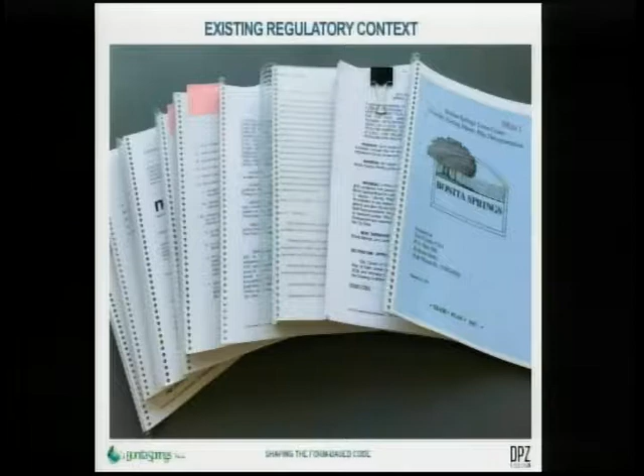These are basically the existing regulatory context, starting many years ago - I'm not even sure what these were, but it's a lot of the documents which we looked at, the zoning code. There was also a very nice white paper written a few months ago, which was very informative, giving us a succinct summary of all the public workshops where you have talked about these issues.

And also in the current existing code, we actually saw many elements of this smart code which I mentioned to you. So we knew that you as a community, your leadership, and your staff are already familiar with form-based coding. You're already implementing a lot of these form-based principles, like how you position the buildings - I'm talking about the overlay in the downtown. The buildings should have parking hidden in the back, you regulate height, some relationship to the sidewalk, and all of that.

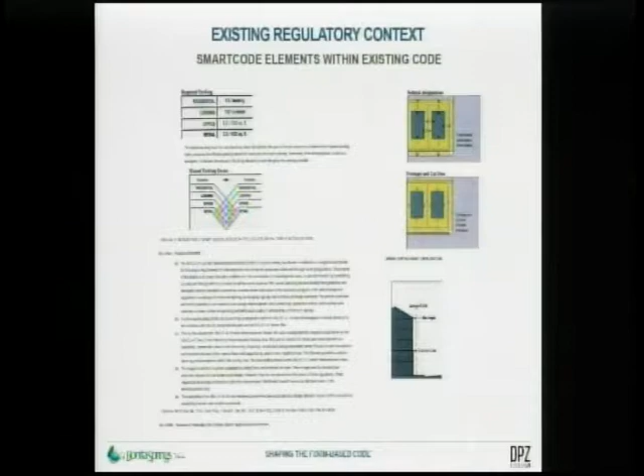So what we want to create now is a finalized, good document, well illustrated, and also not only illustrated, but with a good background, a good backup in the lawyer's language. The law has to be in a written form and also in a drawing form.

So there will not be any doubts or any kind of lengthy negotiation. We would like to create a document which basically represents the vision of the community, what you would like to see as a community, and then to make this code basically easy to implement.

It will be a code which the private sector will be incentivized to go for, with this vision - okay, the community wants this, I'm going to provide this type of building. We agree on how this building will look. It will be this high, it will be a shop front, let's say, and then maybe some residential above. It will have this kind of relationship to the sidewalk.

And if the community has agreed to this overall vision, then it will not be necessary for every project to go through public hearings and lengthy council meetings and all of that. We heard that it's a lengthy process these days - for some projects of mixed-use nature, you need to go through even comprehensive plan amendments and things like this. So we believe that with this simpler, more user-friendly code, it will be easier for the public sector to administer, and for the private sector to actually invest in your community.

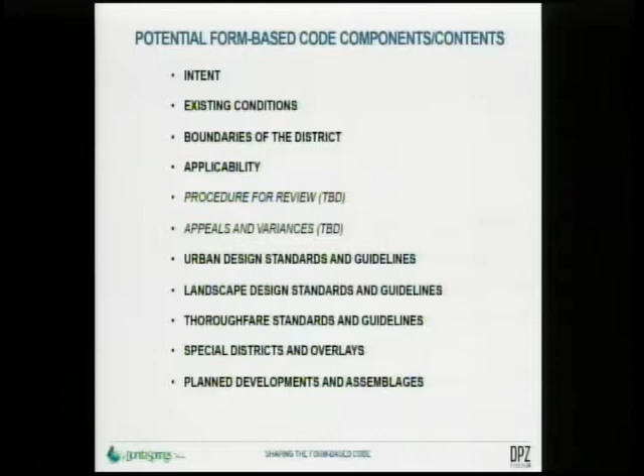So usually a code has an intent, existing conditions to some extent, then it shows the boundary of the place for this code, applicability, procedures for review, appeals and variances. Some of these procedures may go further down in the lower table of contents. Then we have urban design standards and guidelines, landscape design, thoroughfare standards, special districts and overlays, and planned developments and assemblages. That's a very simple table of contents, which is technical in nature, but I will walk you through it.

The intent usually comes out of the feedback from the community. I may start actually reading it from the bottom up.

The big themes will be about scale, meaning that what we heard is that you want the downtown to remain a kind of small town charm and place. You don't want a mega development, you don't want people to come and assemble huge pieces of land and basically destroy the South Floridian character of the place.

It's about aesthetics. We heard also this loud and clear, that it will be the Florida cracker, maybe some mid-century, that you don't necessarily like other styles or some imported architecture syntaxes from other places. It will be about predictability.

So it's about predictability and also maintenance of the value of people's properties. And of course, new investment and economic growth, within which we want to include the younger generation. It's not only because of the smaller scale, we believe that local people who are starting out may be interested to invest and be part of the economic growth, not only as users but also as participants in this next economic phase.

The other ones are: encourage mixed-use development, which is obvious within the downtown areas, and support viable, diverse, locally oriented businesses and cultural institutions. You have all of these things happening there.

We saw the county library taking shape. There are many things to be said about the scale and all of that, but it's a civic building and the county is paying for it, I guess. So we have to be happy and grateful that this building is right there. Because you have the big park in the front, the big square, actually the scale is appropriate. It's a big building.

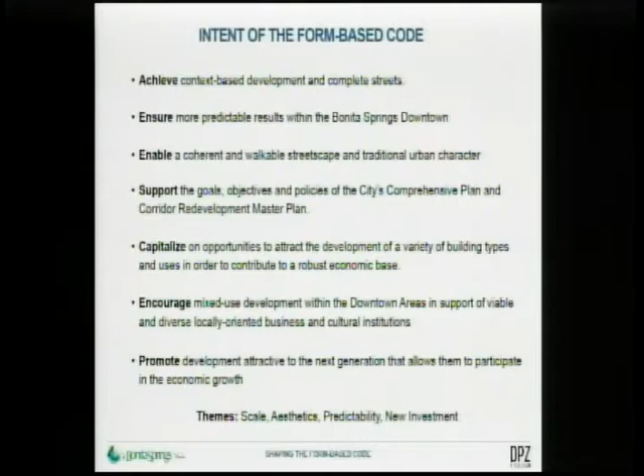We will be seeing whether there are any conflicts with the comprehensive plan, and if there are any, we'll be discussing possible integration or even some changes to the comp plan.

Then enable a coherent walkable streetscape, which we talked about: context-based development, complete streets, more predictability. This is a list we'll be working on together with you, and if you have other ideas, we can craft and wordsmith it. We will also work with the staff and city leadership on this introduction to the code.

In the prior presentations, we talked about the flexibility of this form-based code, according to the comfort level of the community. We are demonstrating that the code can be presented as a thermostat, dialed up or down according to your desire for control, for lesser or more.

For example, in this case, you're controlling the shape of the building, how it meets the sidewalk, whether it's a shop front or a gallery, height, volume, the parking in the back. If you want to go further, you can address architectural features, windows, roof configurations, materials, colors, etc. We were just talking before about the new colors of the City Hall, and how everybody has opinions on these things - some are very subjective.

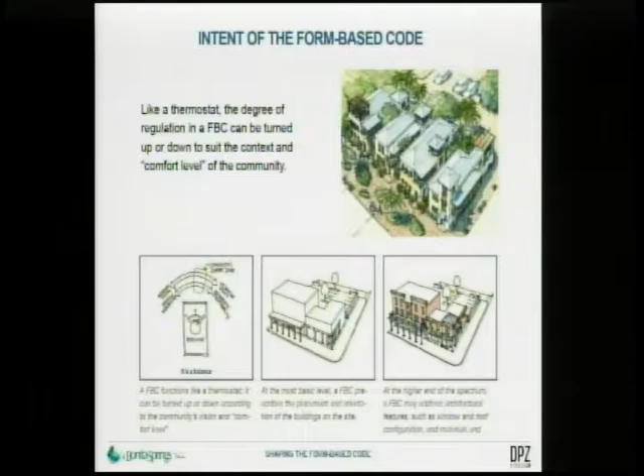For example, if this is a shopfront situation on a retail street, perhaps the setback is very small. When you have a small sidewalk - and in an existing condition this is usually the case - the sidewalk is not wide enough. So instead of saying the setback will be zero because you want the shop fronts, the retail, to be very close to the sidewalk...

...but if the sidewalk is too small, then maybe we can give the setback a little more depth, using some easement on the private property to enlarge the sidewalk and maybe create a plaza, outdoor seating area, or cafe. So the setbacks in most cases are usually, let's say, from 5 to 15 feet or 5 to 10 feet - it's never just one direct number.

I like some of the commercial examples, and in the residential neighborhoods, some houses are good, with the garage set a little further back so the parking isn't in your face, things like that. We saw that the code is not going to be 100% based only on what you have - we will put it at the next level.

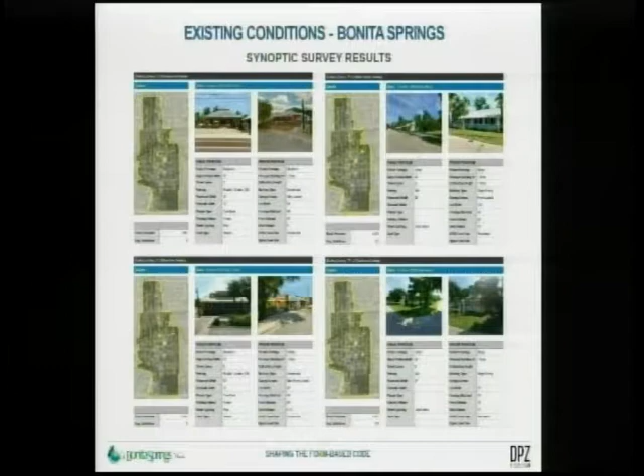We also introduced the idea of the TRANSECT, as we did in the Bonita Beach Road land use study - I don't know how many of you are familiar with it or remember it - but it's basically a system of classification deploying the conceptual range of rural to urban to arrange in appropriate order the typical elements of urbanism.

You can see the TRANSECT goes from nature through rural to suburban, general urban, urban center, urban core - meaning from the most natural and rural all the way to the most urban condition. This is a principle or method borrowed from ecologists.

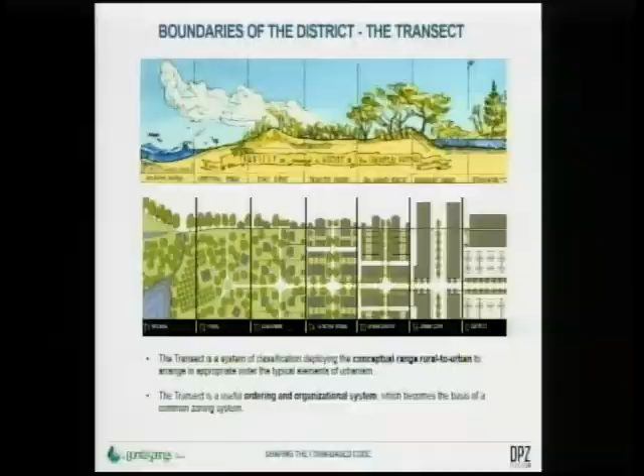It's an ordering and organizational system where biologists were organizing flora and fauna according to different species, and in certain environments flowers, plants, and animals prefer this type of environment. Others prefer the hillier or mountainous terrain, or the water. It's very similar with the human species. Some people prefer to be downtown, others a little further away in the more residential neighborhood. So we don't preclude anything, we don't say no, you're not going to have that. We basically allocate it. Even the gas station or the auto repair have their place.

In your particular downtown, there will be a special district, which is an industrial area, where maybe some of these things will be allowed, whether it's a gas station, some repair, or some kind of very light industrial use, whatever the community decides on. And of course, in the downtown area, in the most urban core area, it will be a mix of restaurants and shops and residential and offices.

We will have 3 main TRANSECT zones, and each of them will have sub areas. For example, T5, we call it the urban center. Usually the TRANSECT goes all the way to T6, the urban core. But because you are a small town downtown, you will probably be at the level of a main street urban center, where you have mixed-use buildings, vertically mixed, but also some buildings which will be

horizontally mixed. Horizontally mixed meaning that some are purely commercial, and then next door are residential buildings. This is also a mixed-use environment. It doesn't need to be like the pancake type of vertical mixed use. You can have mixed use horizontally assembled, and this is basically the flexibility of this form-based code.

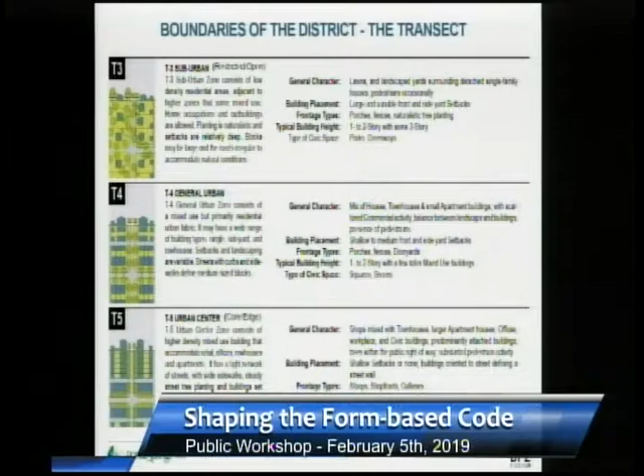Then there is a general urban area where it's a kind of mix of houses, townhouses, small apartment buildings. There will probably be much lower commercial activity, if any—something like a live-work unit, maybe a corner cafe. Maybe not. And then the predominantly suburban area, which is predominantly residential, where you have your normal bigger houses, and plenty of that.

So these zones, like T5, T4, and T3, are basically illustrated with a mix of places here in Bonita Springs and also around the country. We did find, for example, a small apartment building which is 2 stories and looks like a house, a bigger house, but it's actually a small apartment building—let's say 4 to 6 units or something like that.

These are very versatile, nice building types for younger people who do not necessarily prefer a large apartment complex, and would like to be in a place of single-family housing close to a school or close to the downtown, and still be in a more affordable and more walkable environment close to the downtown.

Or a townhouse, for example. This is a townhouse which recently, in the last 50 or 60 years, has received a bad name because they were townhouses in the middle of suburbia, townhouses without the town—like little train racks in the middle of parking lots, not townhouses as part of a town.

So it's a building type which has returned a lot, at least around the country. This is in Coral Gables, which is also a leafy suburb, like a suburb of Miami, but they have townhouses, and they're extremely successful because of the shifting of the market. The younger generation wants smaller units, fee simple, like single-family housing, but without the big yard to maintain, as well as the retiring population.

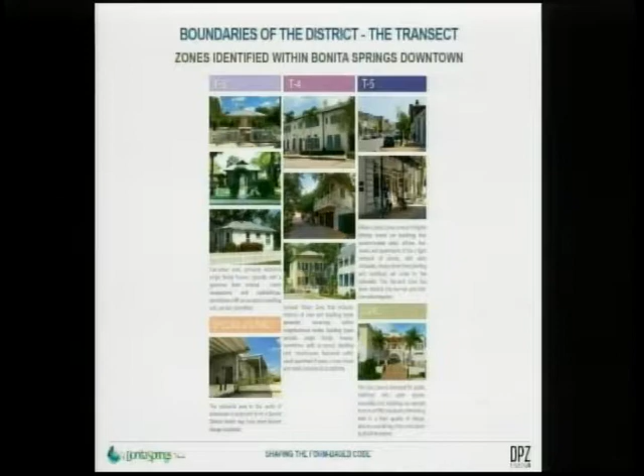And right now, in your neighborhoods, in your residential areas, you have the townhouse as an allowed use or building type. So these zones you see here are basically based on your town center concept plan—this is the old US 41 corridor redevelopment master plan. I imagine that this came as a document following a lot of public involvement. What we noticed is that it is a kind of very specific zoning.

There was one piece here, and I don't remember exactly where it was, like, oh, this will be a hotel, or this will be the townhouses right here or right there. It was very specific in its predictability, kind of like spot zoning.

What we would like to propose is a more flexible environment along the main corridor, Old 41, which is the most intense area. We have two colors for the T5 or core zone, a lighter and a darker one. The darker is the most mixed use, intense urban area. The rest is T4, a mix of townhouses, small apartment buildings, and houses. Then it transitions to T3, the more suburban residential areas on the east and west.

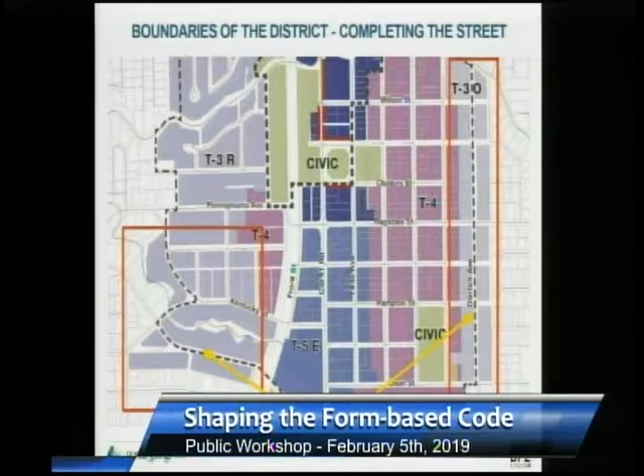There was some feedback when we presented this regulating plan last time. We heard that we made some mistakes—people said, oh, this color, you have to expand, you have to move it around. This is the beginning of the mapping exercise, so we'll be working together with you to understand what you mean.

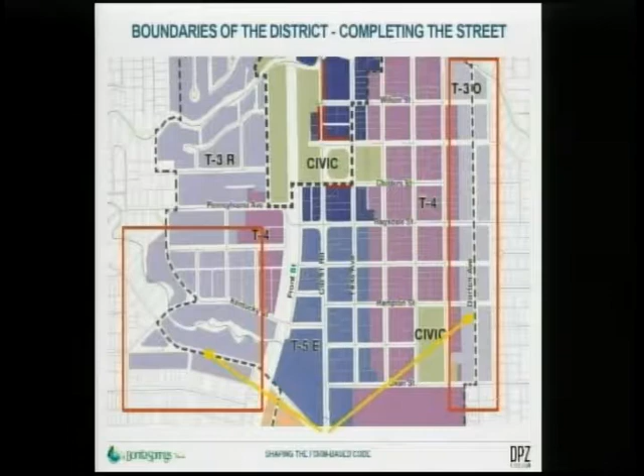Just to show the existing boundary, and how we are expanding one layer outside of it, so the street feels more symmetrical on both sides. Not that it's impossible to be asymmetrical—if you decide you want your downtown boundary in the middle of the road, that can be done, but we recommend the other way.

This was another public workshop comment. I think we had a different color for this T-zone, so we basically changed it as recommended.

The applicability of the form-based code—what does it mean? As I said before, it applies to the existing Bonita Springs downtown master plan zone and additional blocks shown on the previous slide. But actually it is expandable, as I mentioned, it can go further.

It's either for the nodes along Bonita Beach Road, the intersections with the big thoroughfares—you could apply form-based code only for those. Because today we were driving along Bonita Beach Road, and honestly, it's not going to be urbanized anytime soon. It's basically a more suburban type of thoroughfare because it's your major east-west transportation corridor.

It will be important that your nodes have a different character, so you know you're arriving at downtown. The one at the intersection with Old 41 is probably the most important, as your gateway on the east side and also to the beaches. So these are areas where you could consider expanding the form-based code.

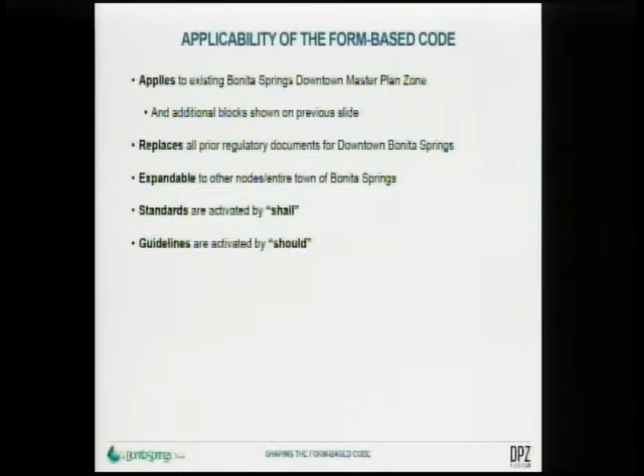But you can also apply guidelines, which are activated by 'should.' For example, what is a guideline which should? Like maybe the frontage of a building should be one of 3 different types of frontage, a front yard or something else. What else can it be? Your window proportions - we were talking about the window proportions of the library and how it's a kind of saving element, really beautiful that they're vertical and big.

Maybe you decide that all of your windows throughout the downtown should be a vertical proportion. But maybe somebody does a building in more Art Deco architecture syntax and they want horizontal windows. That's why, since you're not certain and want to see how it will be built, you say windows should be vertical proportion, meaning it's not mandatory, it's recommended. People usually tend to follow it because it's easier - when something is written as 'should be,' they know it will probably be easier to get approvals when they follow the guidelines. But these are recommendations, not necessarily mandatory rules.

So there will be standards and there will be guidelines.

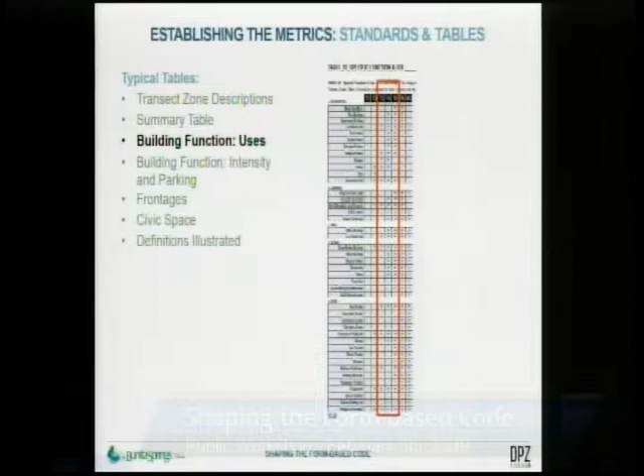Or, for example, a motel. A motel cannot be in T3 nor T4, but why not in T5, if you want it, whatever motel means. It can be an inn, or a bed and breakfast. For bed and breakfast, in this generic smart code we say it can be in T3, T4, and T5 - maybe some of the larger houses are converted into bed and breakfasts. There are many neighborhoods around Florida which are incredibly revitalized because of the bed and breakfast element - they became known on the map because there were a couple of bed and breakfasts in these places, and things like that.

So these are the uses. Then building function, intensity, and parking - this is the relationship of the different uses and the parking requirements. Usually we say that your intensity and density is 100% dependent on the parking, how much parking you can fit.

I believe you have some of these diagrams almost directly applied from the smart code in your current zoning code. This has been changing - all around the country municipalities have been reducing their parking requirements.

There are cities that have eliminated their parking requirements altogether, so in places you can build a building without any parking on site, because it's in a downtown, walkable environment. Why should we require so much parking? The more parking you require, the lesser building envelope you leave for development. You reduce your real estate, and in many cases it becomes impossible to develop anything because parking is expensive. If you want to build something taller, you have to build a parking structure.

A parking spot costs between 20 and 30 thousand dollars. Can you imagine? Recently I learned that we have 500 million parking spaces in this country. We're 350 million people, but we have 500 million parking spaces in garages. It's totally insane.

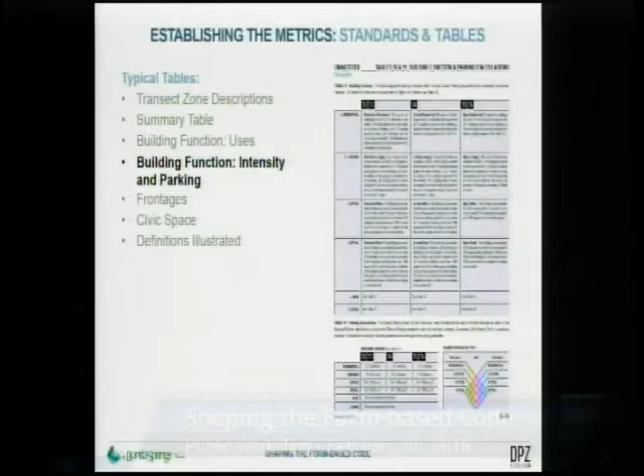Many of these uses can use a shared parking percentage. For example, an office park is empty at night. An office building is emptied late at night, so maybe you can share it with another function. Residential and office can share this parking. Retail can share with something else, like residential or restaurants. We've done this around the country, and people have been very happy, because parking is an issue.

You can be overwhelmed by a lack of parking if you are extremely successful, mobbed by people coming here. It's absolutely possible, and it may be a good thing to have, but we have to calibrate it to your condition. You will tell us what you want to see, whether parking garages, surface parking, or something with the internal flexibility to be turned into something else in the future.

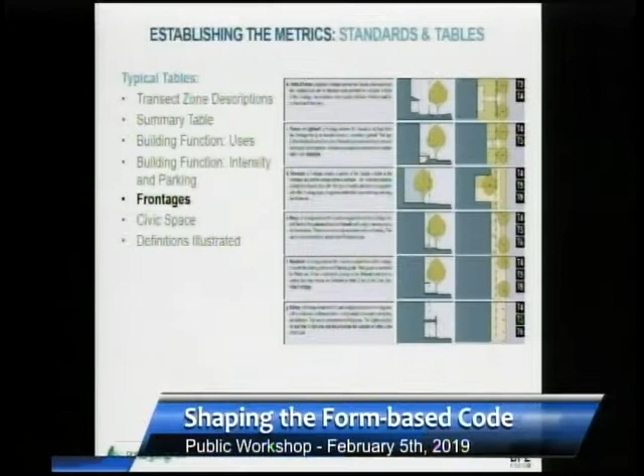Frontages are also a very important element of the code, where we have assemblages of private frontage types, like a gallery, a shop front with an awning, a stoop, a forecourt, all the way to a porch and a fence. Some of these you have here already, very typical, like houses with porches, and galleries.

I don't think that you have any galleries, maybe you don't, or arcades or whatever. If you would like to see some of those in your downtown, we can very easily implement them, or it can be something very simple as awnings, for example, along your retail streets.

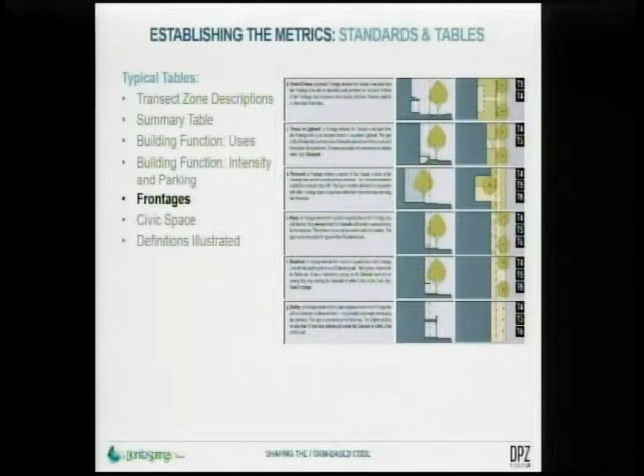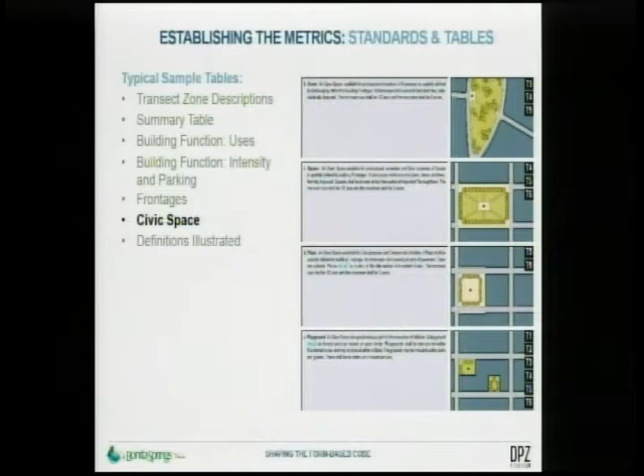Civic space, how you shape civic space, this is important, that there are different types: playground, plazas, squares, greens. That's also very important, how the terminology is defined, and how we as a community can share the same terminology. For example, why is it important to have a term like a plaza for something which looks like a square and then it's a green? Because they have different characters. It's open space, yes, and there are buildings around, but they're different in character. And this will actually be the beauty, that you can go from one street to the next and encounter public spaces or streets of very different character.

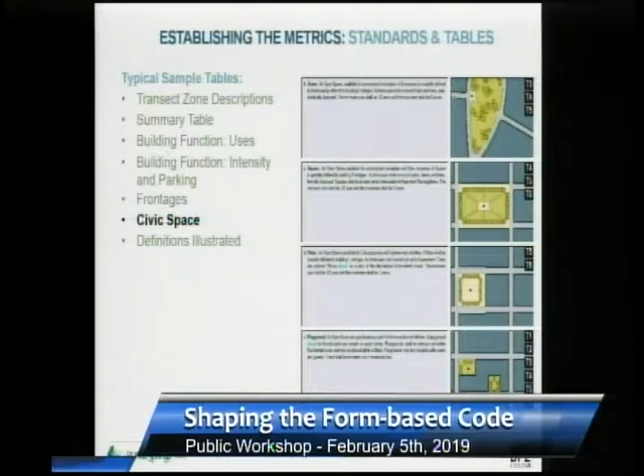Along your main corridor is the most urban with the shops and all of this. Then you go further in and maybe have a smaller space, then you go to your square, let's say the big square in front of the library, but then maybe on the edges where the water is, where the creek or river is, you have a totally different character. So it cannot be the same design and the same means applied to these different places. So they have to definitely be varied.

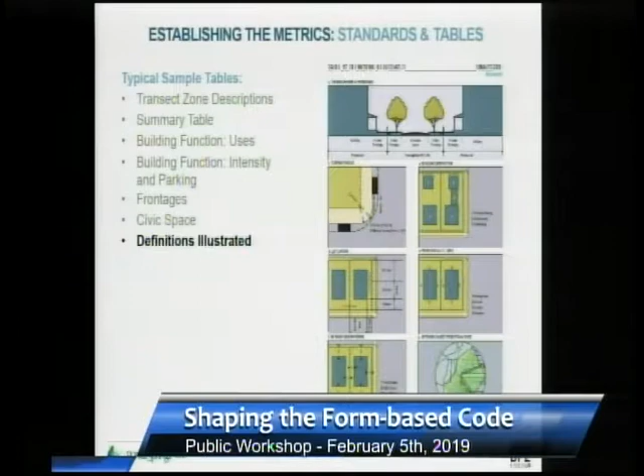Oh, here it is, the definitions. We'll be talking about this, there will be a section on definitions, and some of them may be illustrated.

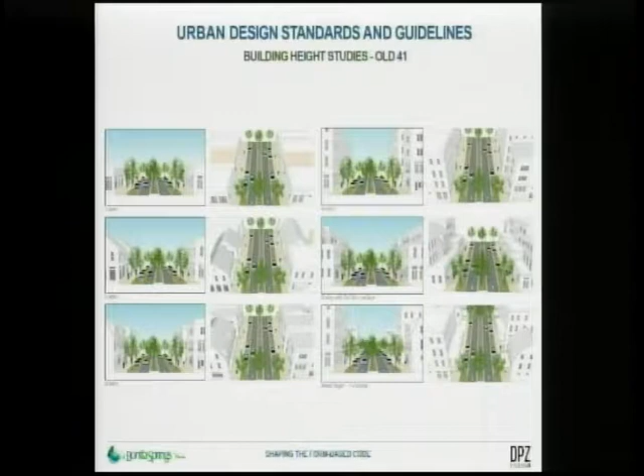And then with the mixed heights, where you can have buildings which are 1 story, and it's difficult to see here, but it's like 1-story, 2-story, 3 stories, and 4 stories. We started the discussion, are you going to put the 4 stories, and how are you going to allow this variety to happen? There was one idea that we allow 4-story only on the corners, or only in the form of a small tower, a smaller footprint building.

Maybe you have a 3rd floor usable terrace with some element which is 4 stories, but not the whole thing. So you're going to have a varied streetscape, a varied silhouette, which may be unique for your downtown. This is an illustration of building height, orientation, and massing. Here we put 4 stories, so you see it's like a 4-story building, 3, 2, and 1, with setbacks. The most important thing from this code will be this drawing. This is only an illustration, not going to be the law, but it's important because it will show parametric size of lots, depth, and setbacks.

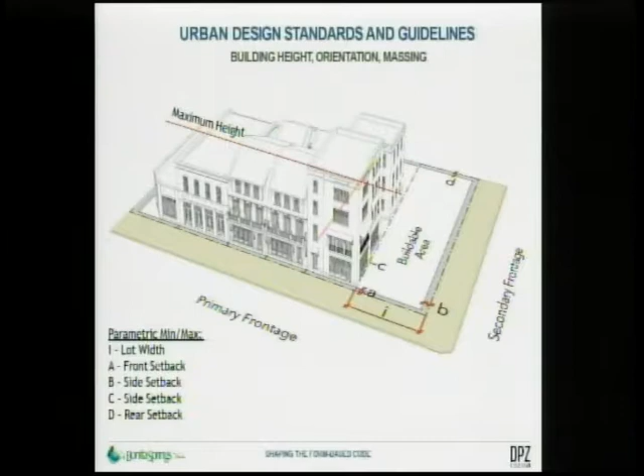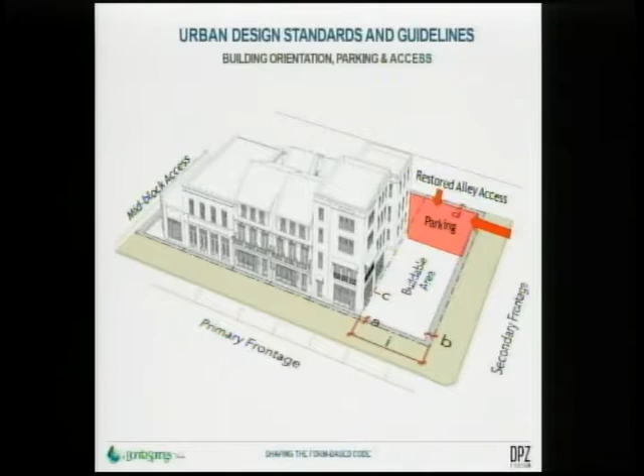It will also be important for the downtown to restore your alley access. You have historically had many accesses and many alleys, and they were basically deleted or lost over history. It will be important because most of these buildings will need servicing, so you cannot have all good fronts on 4 sides or 2 sides. So you need probably the restoration of some alleys.

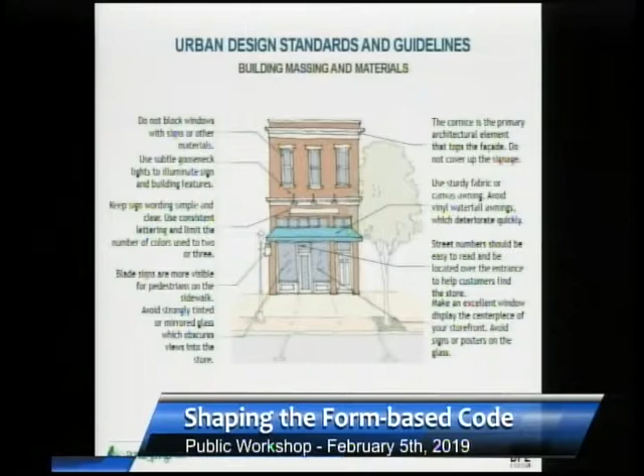Urban design standards, building massing, materials. This is not Bonita Springs, it's from another place, but we just like to explain what we mean by that. These are some rules, and some are more guidelines than standards. For example, we can advise to use particular materials or sizes or colors for awnings, and this will not be a standard, it will probably be in your guidelines.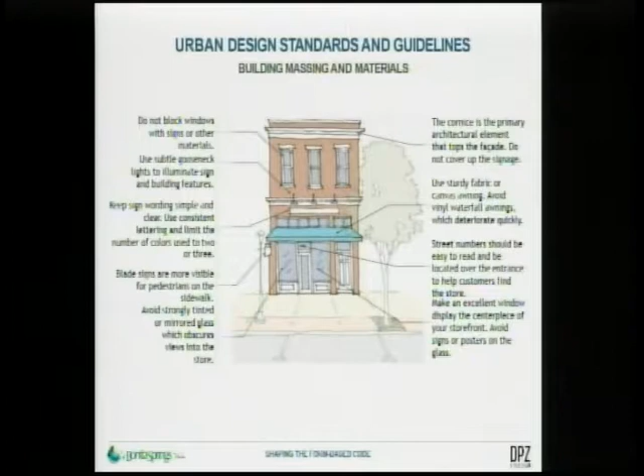Another important guideline: avoid strongly tinted or mirrored glass which obscures views into the store. For storefronts, this will be a requirement - you shall not use tinted or reflective glass, because this is basically death for a storefront. If they do this, they're not selling anything, they're basically hiding, and it kills pedestrian movement and activity.

Here is an even more detailed signage recommendation and guideline - how you do a window sign, how you do an upper building sign, a hanging blade sign. This is basically signage to the galore, and we can actually calibrate for you 3 or 4 sign types, not everything. You don't want to be like the world parade of signage.

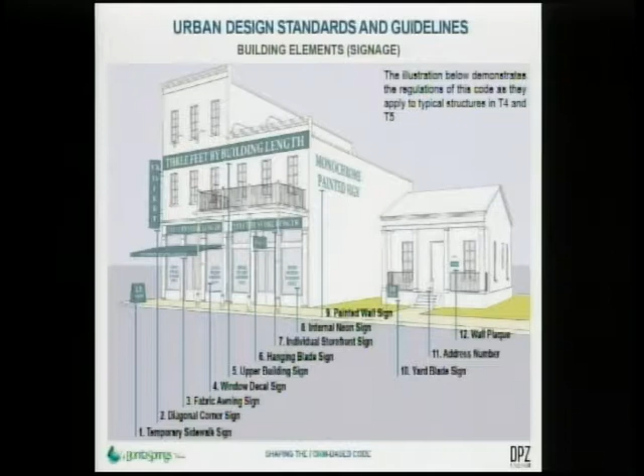So see here, this was a more traditional type of signage, and the same signage situation applied to a more modern building. I'm showing these strikingly different architectural syntaxes as illustrations - it will be up to you how much you want to influence the architecture and the look of your buildings.

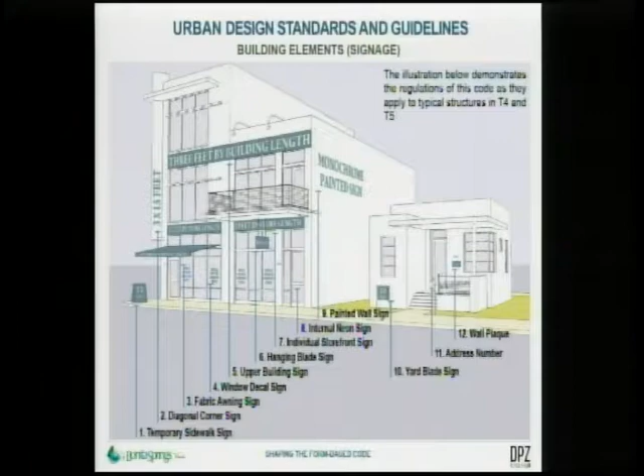Here's how we wanted to illustrate the 4-story option. Instead of arguing whether we want 4 stories or not, maybe you allow it partially. Here in this case, it's 3 stories with just a small tower and maybe a usable floor. This building is 3 stories. In this case, you have a bigger piece - a 4th floor tower allowed. That creates an interesting silhouette.

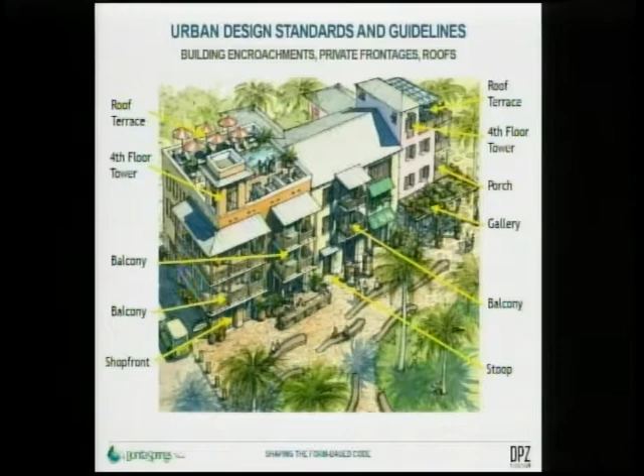So it's not necessarily a wall with a setback like in Naples, but basically giving the opportunity for a habitable upper terrace. These are the different elements - a balcony, gallery, porch, and other things. A shop front here, a roof terrace here, and so forth.

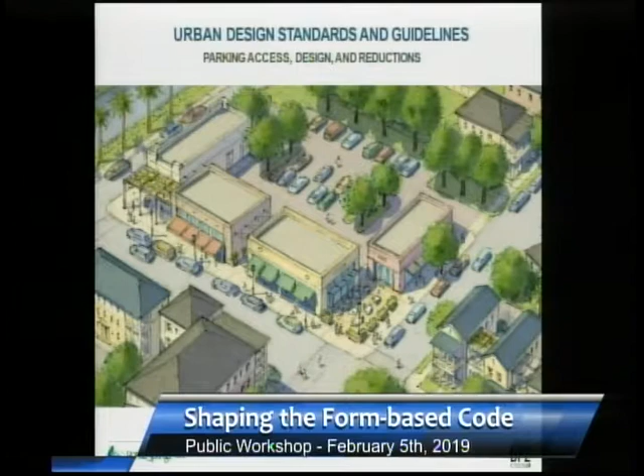These are the parking access design and reductions. This is an illustration - Bonita Springs downtown is not exactly like this, but some of the stores you have are just one story. They're very similar. They don't yet have a unified frontage with awnings or other elements.

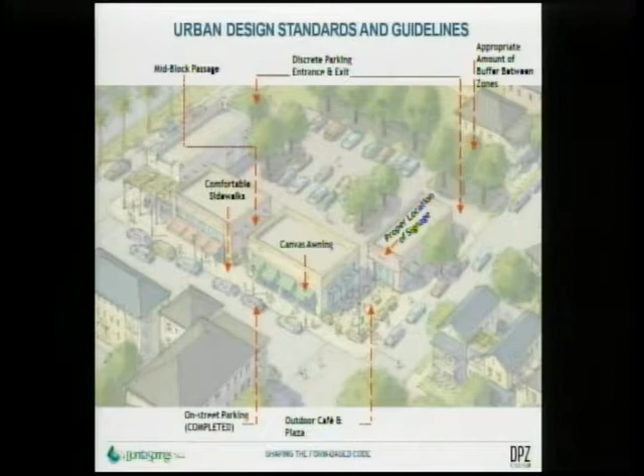But this can be achieved - the canvas awning, the comfortable sidewalk and some passages, the plaza, on-street parking, which you already have completed, proper location of signage, and all of these. This is a long list of a wish list of regulations or guidelines which we can apply or not.

We don't need to. In this case, all the parking is consolidated in the back, and that's something to discuss - whether instead of looking at the parking as a single lot, it can be a shared parking lot in the back.

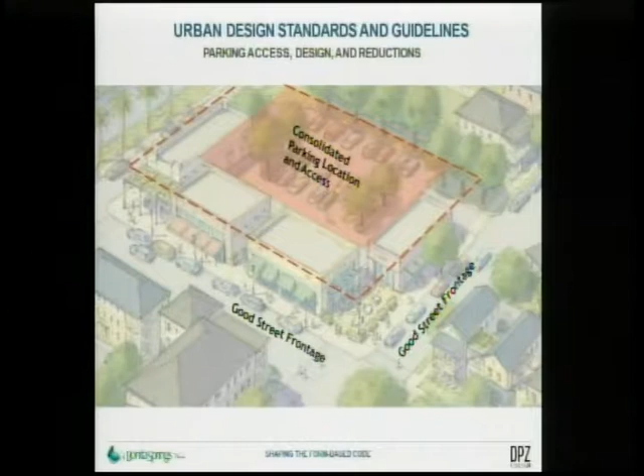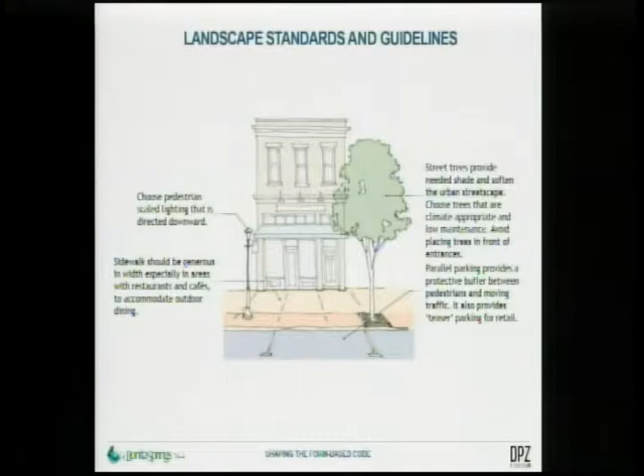This is landscape standards. Of course, this is also an important portion of the code where we will be looking at it, and the good news is that you actually have this already, so it's probably not going to require a lot of that.

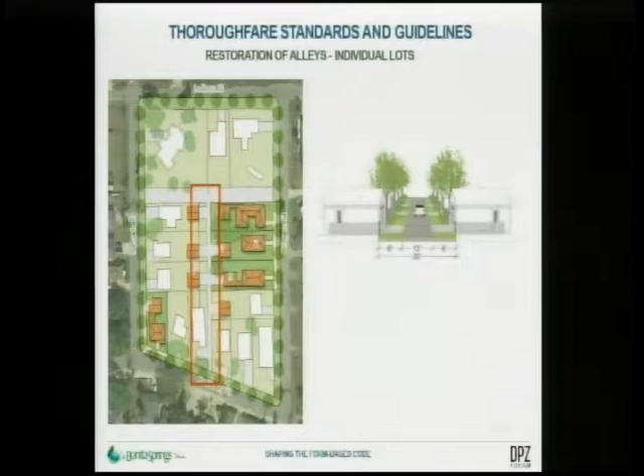The restoration of the alleys. Here are some examples which we worked on, preparing the introduction to the form-based code - the restoration, in an area of single-family lots, how you do it, and you can basically feed the alley with garages from the back.

This one is a larger assemblage - I believe it used to be single-family lots, and now it's a trailer park. Here we are proposing a combination of single-family housing and duplexes around a bigger green with a little alley in the back. So the restoration of the alley gives the potential for really nice development, very compatible with single-family housing, but giving more variety of building types, like duplexes, and creating higher density.

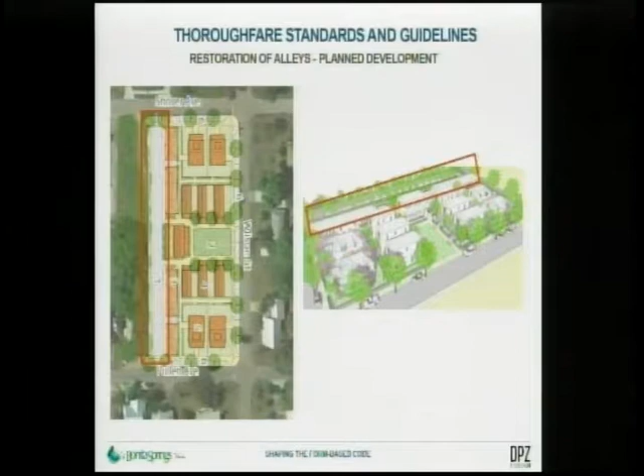For more attainability. Special districts and overlays - I mentioned the industrial area, which we now call a special district, and we thought it would be interesting to propose the possibility of activation of these places in a more tactical way, step-by-step, or cheaper, faster, and more interesting way.

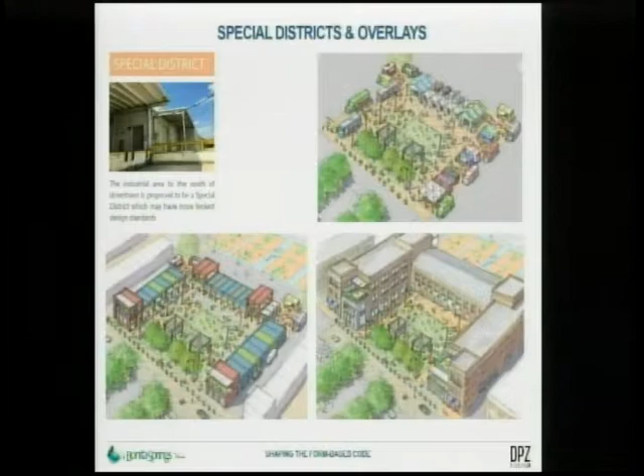Whether it's with food trucks around some public space, maybe bringing some shipping containers initially to show that something cool is happening, maybe artists will move into some of the buildings - it depends what you want to see. There are areas like in Miami, we have Wynwood, which was an industrial area, dangerous and crime-ridden and deserted for many years, and now is the coolest place in town, which has gone through several reincarnations.

You know, there was a place called Wynwood Yard, where it was basically a parking lot with all of this happening—food trucks, a little place for yoga and performances, public gatherings, and all of that. There was also a restaurant, a cluster of restaurants made of shipping containers. Now it's being redeveloped in this last stage of development.

Now it's being redeveloped by Lennar with multi-story buildings. But during the several years of growth of the area, it was not just a parking lot—it was activated with different uses. So this is one idea.

Another assemblage—here it is. The prior one I showed you was with one-story buildings as you have them today. This one is illustrating a little taller, but you still may keep the smaller scale fabric of the place, and it will be up to you what lot size you're going to leave as the minimum size and what will be the maximum.

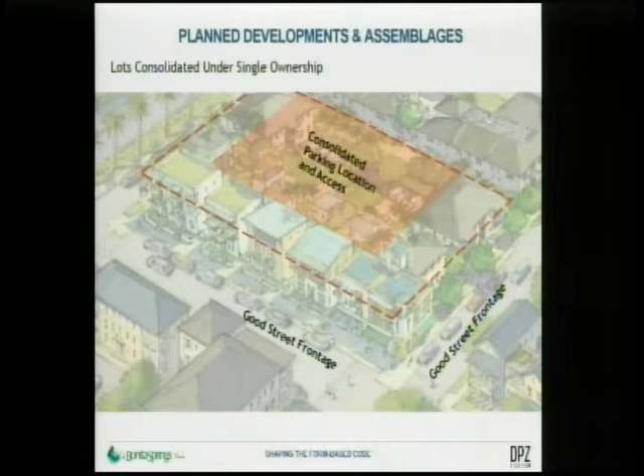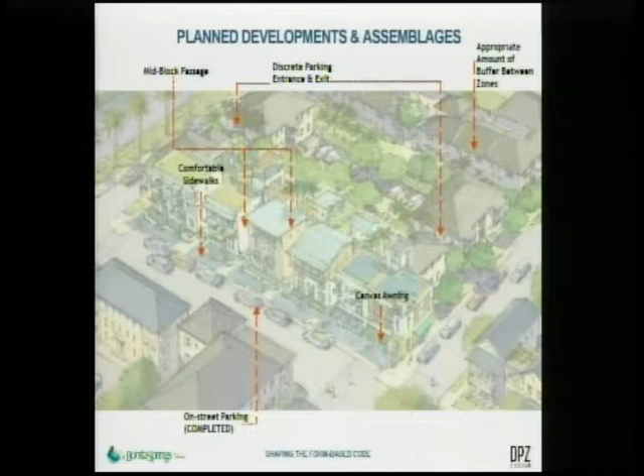What's important is actually to keep the scale of the building frontage, even if it's assembled into one large block—that's not impossible, unless you decide you don't want to make a full block building, which is also a possibility. But even if you allow this large assembly, we can write rules where it will read as smaller buildings. I'm going to show you an example later.

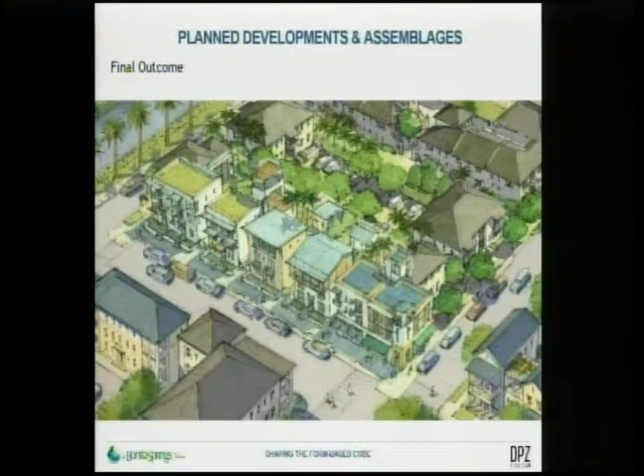See how this one still has the fabric, you can see that. But this effect can actually be achieved even if there's a big parking garage in the back, let's say. We demonstrate this with the so-called bamboo site, which was a separate assignment and task for us.

We were to look at this area, which is basically on both sides of two large city properties on both sides of the river. I want to demonstrate that you can create urbanism with smaller buildings which look like bigger houses, and with surface parking lots.

Or you can go and do something with a garage, but nevertheless you still have incremental pieces of the building—it's not like a mega monolithic thing that suddenly destroys the small town character of the place. So this was an exercise in shaping the scale.

We keep the scale of your town basically to—here we had, I believe, like 3.5 at the most, 2 and 3 stories. Even if you have larger scale parking in the back, or more intensive development in general, it can be regulated. The building size, height, bulk, and look can be regulated with the form-based code.

And I believe that's it. Is this it? The rendering—yes, this was basically done here in Bonita Springs before we came.

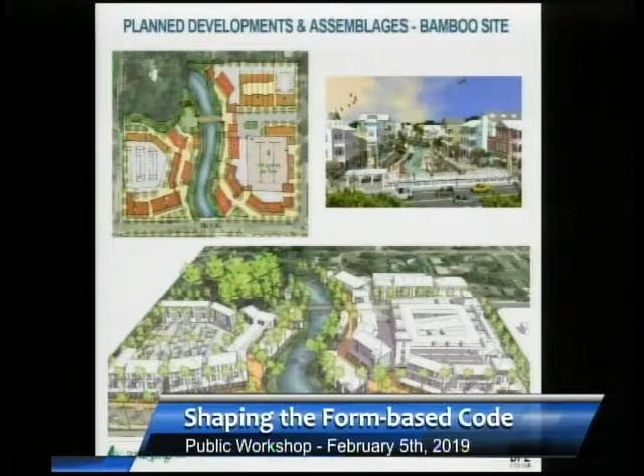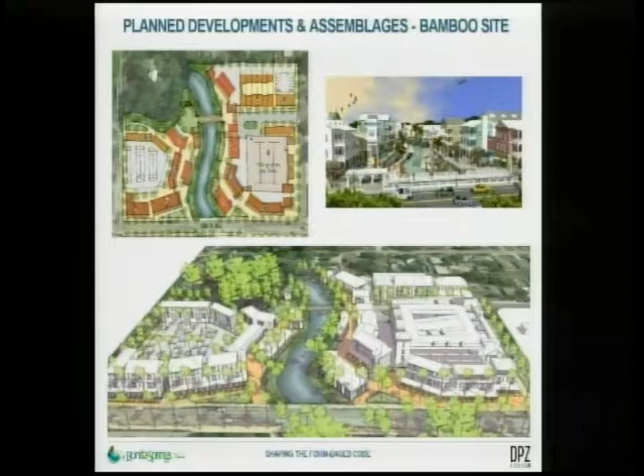In this process, your community vision was about buildings which are detached, not continuous walls of very urban buildings. You're not Naples, you're not Miami, you're not a big urban place. You're a smaller town, a more relaxed South Floridian type of town, which is the original charm of Bonita Springs—that's why people come here. We believe that through the form-based code, we can calibrate this type of development. So if you have any questions, suggestions, or grievances, please go ahead.

The City of Naples requires 100 square feet per... we're recording, so if you could just use the microphone.

The City of Naples, in Old Naples, has run into a problem with parking. They don't quite have the urban atmosphere down there even though it's quite compact. Their requirement for restaurant parking is one parking space per 100 square feet of restaurant space, and it's really cut a hole in the old district because the parking is just too intense. Now restaurants are being discouraged from opening up.

So how will that affect us in this area as far as parking requirements? If you're not so concerned about it by the sounds of what you said, that's going to be an issue for us going down the road.

No, I'm very concerned about the parking, actually. We are concerned about the situation with the parking because we are in a transitional period of time. But I'm just alerting you not to go with the highest requirement right away, and then backtrack and say, oh my God, we built two big parking garages or whatever parking spaces, and now we don't need them. Just be cautious on that side.

We know the situation with Naples, and we did the original master plan in 1990, 1993. They will be adding another garage from what I know. This usually happens in places which are becoming more than their own a kind of local destination, more of a regional destination because of the success of Fifth Avenue South and the restaurants and everything. We will definitely look at the parking situation and try to have a recommendation and a standard which is flexible, something which works today but can also be reduced or expanded tomorrow, and works 20 years from now. When we did the study in 1993 or so, there were no parking garages, the buildings were one story only, and just by restriping the on-street parking we got like 200 extra spaces, which was quite amazing. I believe here you have done most of this. You have a lot of on-street parking, and you should not underestimate that. We haven't done any parking studies, and it's not part of our task this time around, but this has to be definitely taken into consideration.

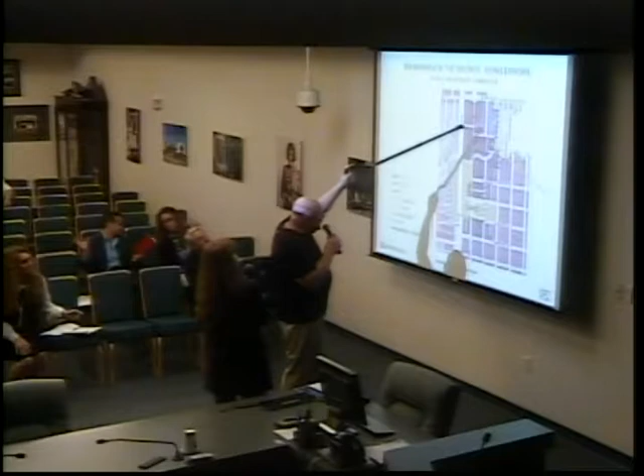That makes sense. And then the other piece I question is this piece right here. It faces T5, so I think it should match that T5 as you come around the corner. I agree with everything else. Those are the only ones I had any problem with at all.

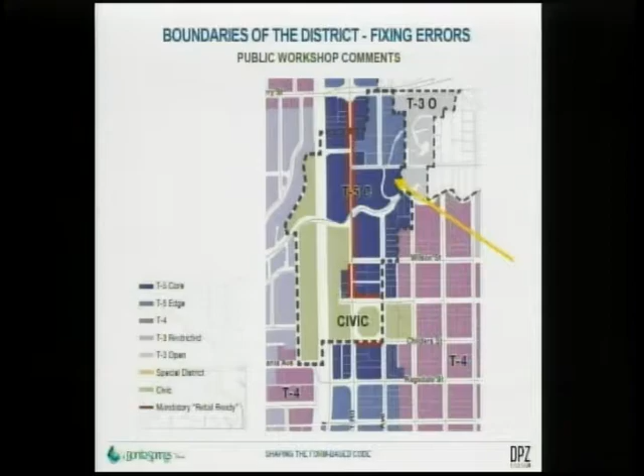Good, good. And we're going to have opportunity tomorrow for specific questions on specific properties. So I think now you're looking for general concepts at this point, and we can spend more time if someone has a specific property.

I just wanted to ask, we had a recent meeting of the Downtown Alliance in which there was a little bit of confusion about exactly what properties and specifically what was involved in this. My understanding is we're talking about the city-owned public properties.

So for this workshop, this is looking at form-based code for the entire downtown corridor. More specifically, DPZ is going to be looking at the city-owned properties and creating a plan for potential development of those, and options to be brought back to council on what that might look like in the future.

Follow up, how will that affect the businesses that are already there? Is this going to change what they're already doing? Is this going to affect us by prohibiting things we have already done?

I'll let Galina explain more about the form-based code, but it would be implemented as you would a land development code change through the land development code process. Existing businesses and items under that would be, if there's a conflict between the uses, grandfathered uses as well.